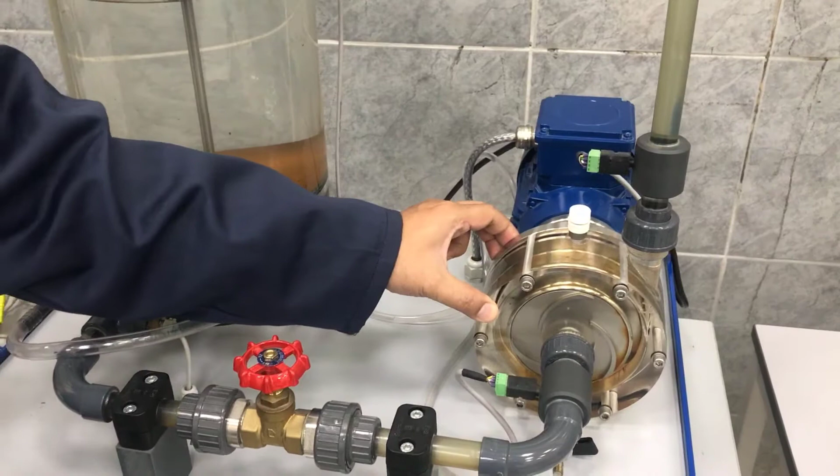Okay, so this equipment is a centrifugal pump experiment. So we can do experiments with a centrifugal pump here. So let me check some of the parts here. So our centrifugal pump is located here. So the housing or the casing, it is on a solid acrylic glass.

Then you have the bleeding section here. So we will bleed the pump by opening this nut here. So this is to remove the air inside the pump. So then we have this valve, we call it V1. So this valve will control the suction side of the pump. Then we have V2, controlling the discharge of the pump.

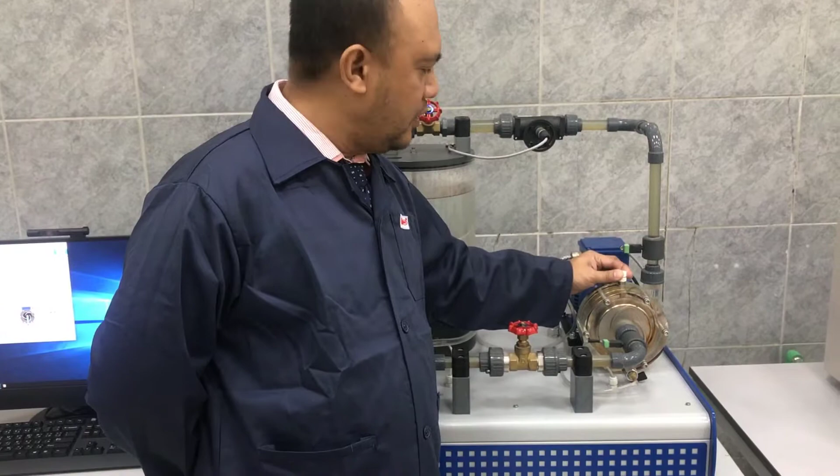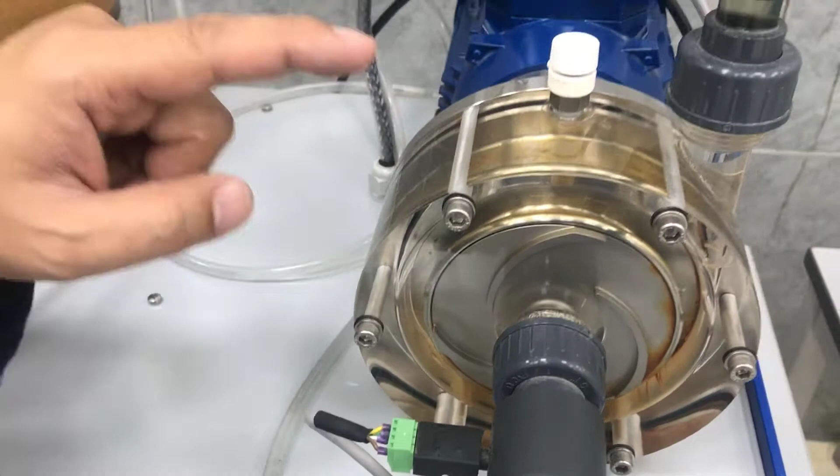So for experiment number 1, we will be measuring the head and the power of a centrifugal pump. So the first step is to bleed the pump. So open this, release the air from the pump and close it tightly. So as you can see, the pump is filled with water only. So this is the first step. The next step is to fully open V1 and V2, this valve. Okay? So we have 2 gate valves here, both must be fully open.

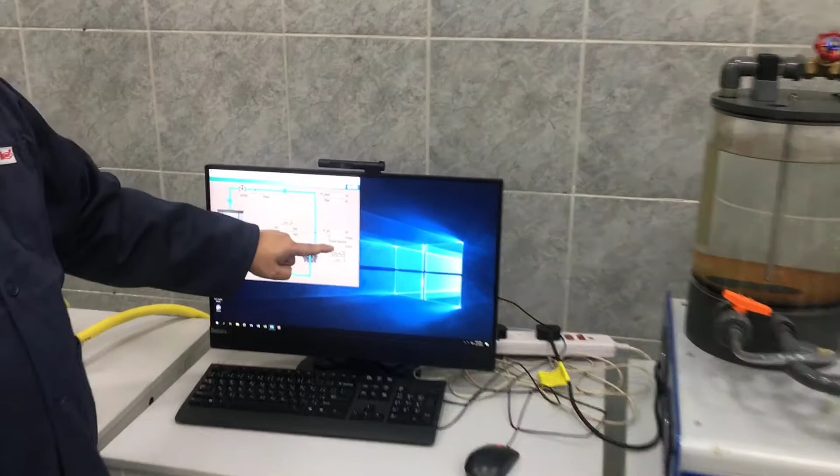Now, referring to the table, we will set the RPM, the pump speed, to 3000 RPM. So this centrifugal pump is interfacing with this computer, with this PC. So all the control will be on this software. So after bleeding the pump, opening the valves V1 and V2, set the speed to 3000 RPM. So we will be using this RPM all throughout the experiment.

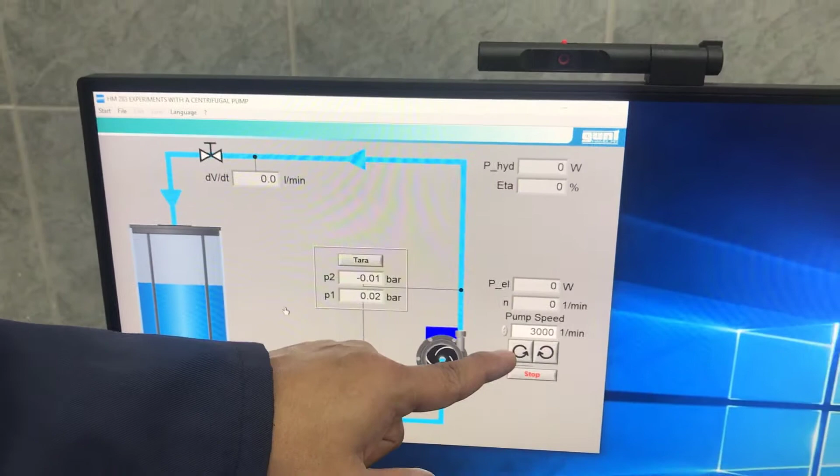So how to switch on the pump? Press this one. So this symbol means the rotation of the pump is in anti-clockwise direction. So as you can see here on the pump, when the pump rotates in anti-clockwise direction, the direction of the water pumping is towards this direction, so moving up. So the rotation is anti-clockwise direction.

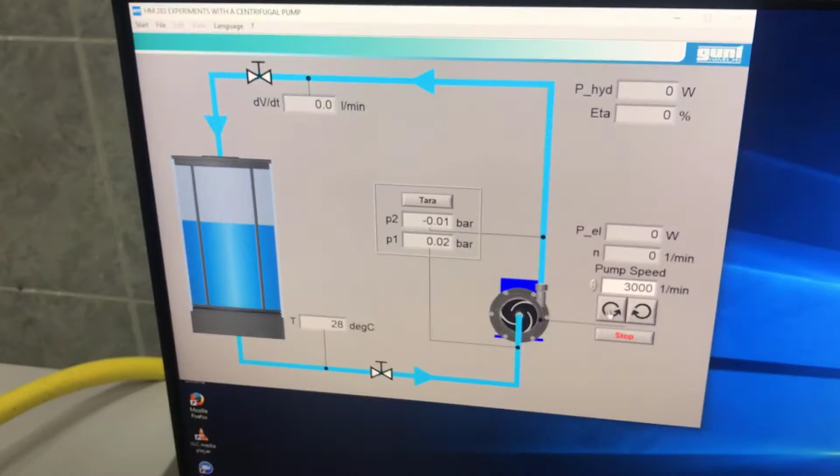So let's start checking first the operation of the pump. So by pressing this, the pump will start running. So from the suction side, through the eye of the centrifugal pump, the impeller, and then pump it up. So this sensor here measures P1, the pressure in the suction, and P2 at this point, the pressure at the discharge.

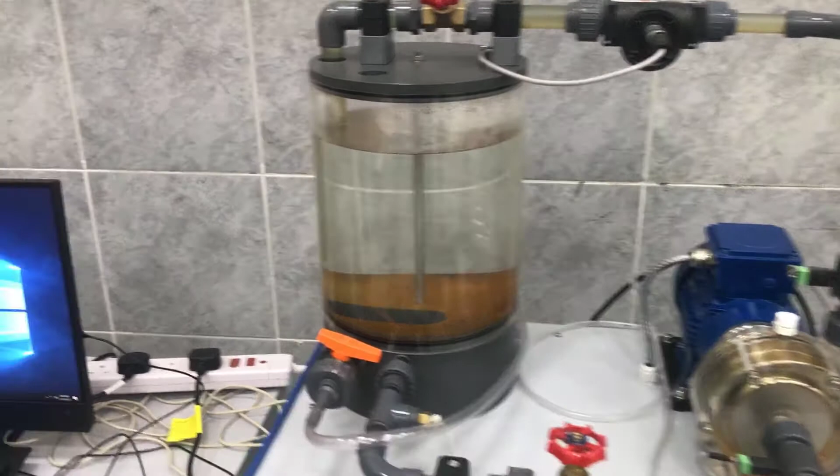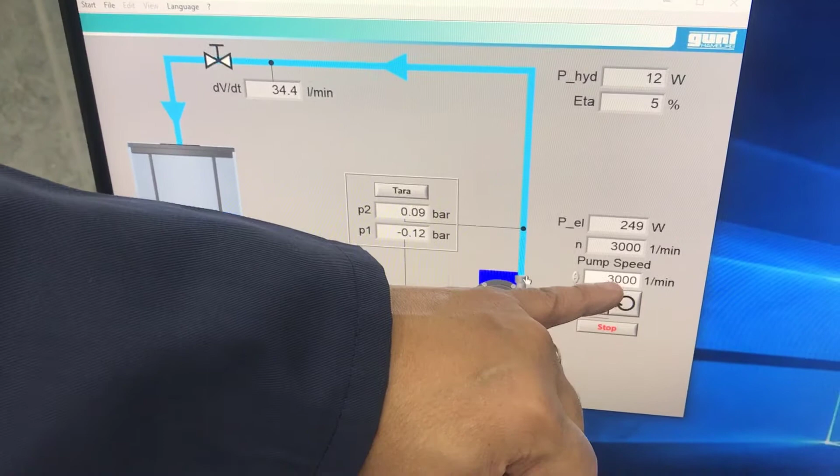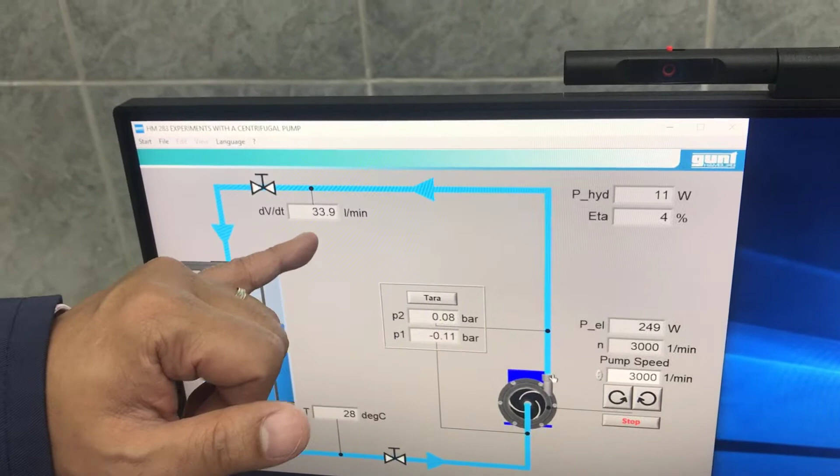So for the first trial, we will take the reading of RPM. So we will be using this one for all the trials, 3000 revolutions per minute. So this is our RPM. Then we will measure the Q. Q is in liters per minute. So 34.4 liters per minute. If you can see on the table, it should be in liters per second. So this reading, you should convert it into liters per second.

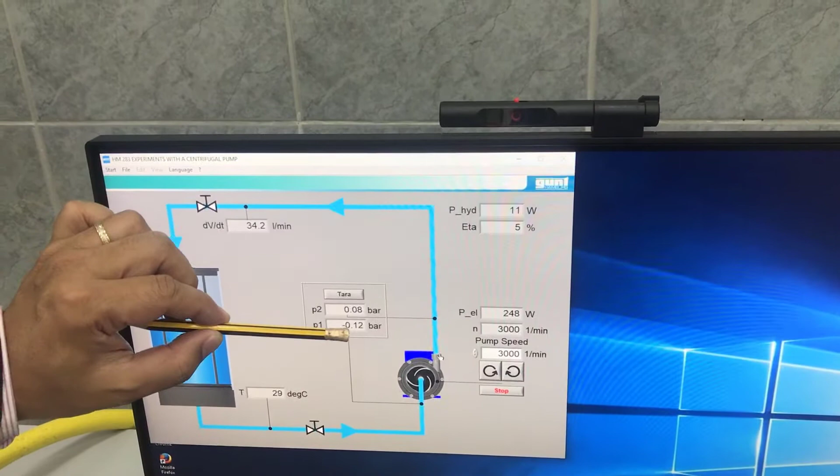So let's take the reading for our trial 1. So the pump speed is 3000 RPM. The Q is 34.2 liters per minute. Now P1. So P1 will be negative 0.12 bar. So as you notice here, the unit is in bar. So you need to convert it to Pascal in the experiment. So we'll be using metric units in the experiment.

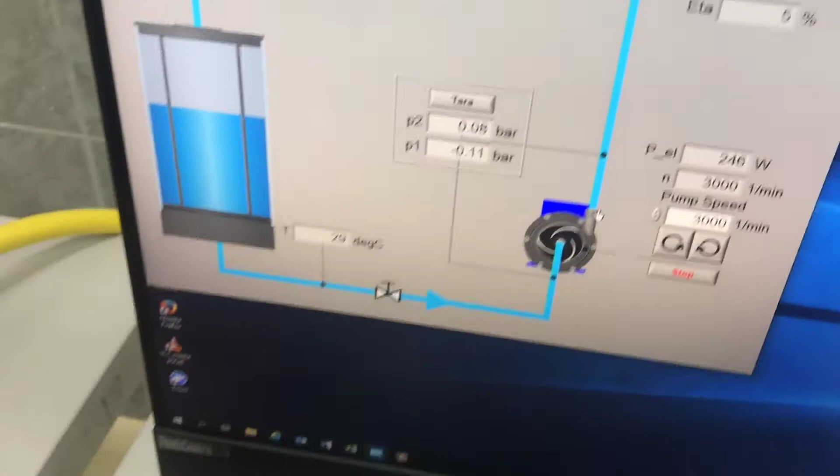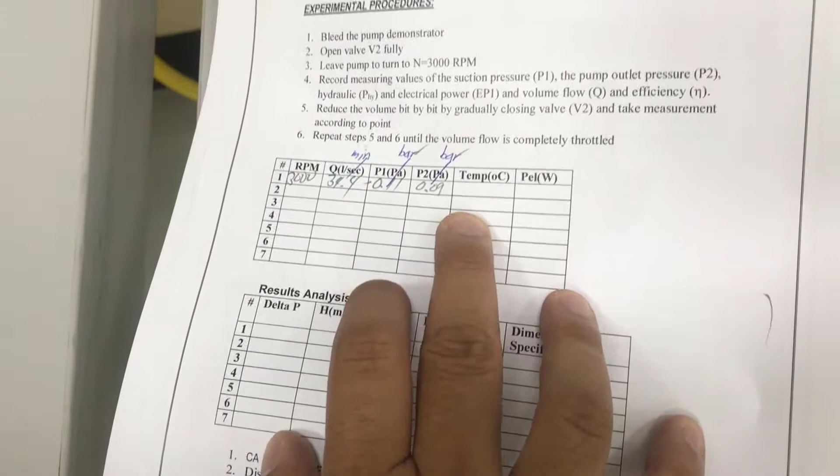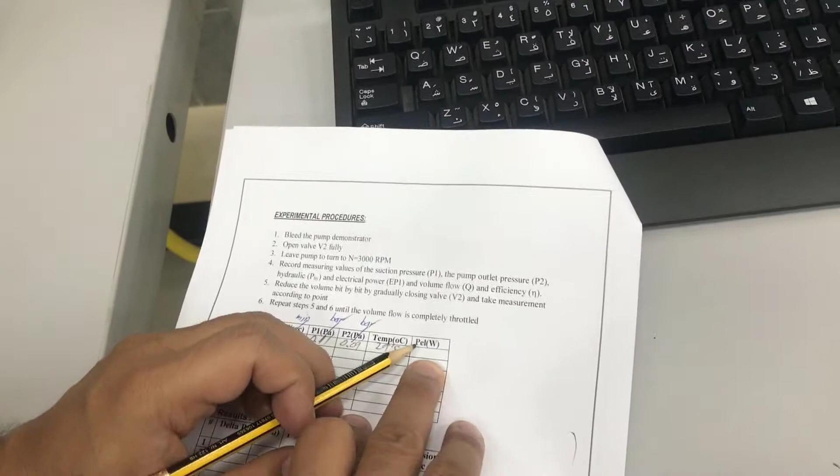So 0.12 bar for P1 and 0.08 bar for P2. So this is in bar. Now the temperature, it is also shown in the software. So this is the temperature running on the system. So we have 29 degrees. And the power, electrical power. So electrical power, this is PEL. So you have 248 watts.

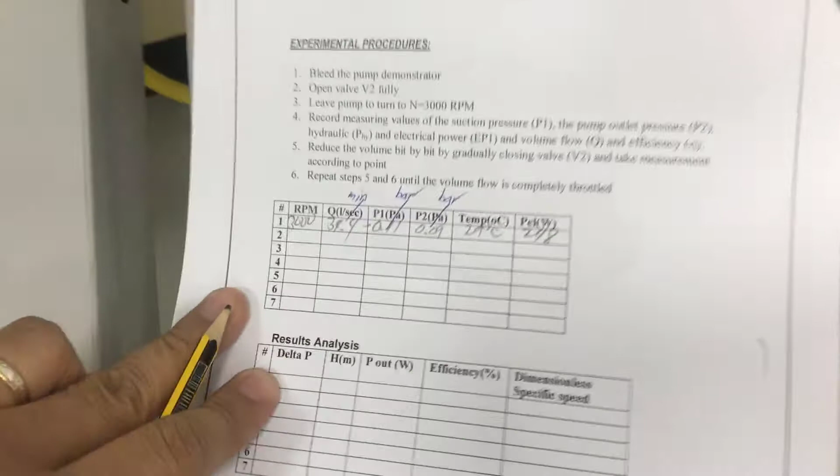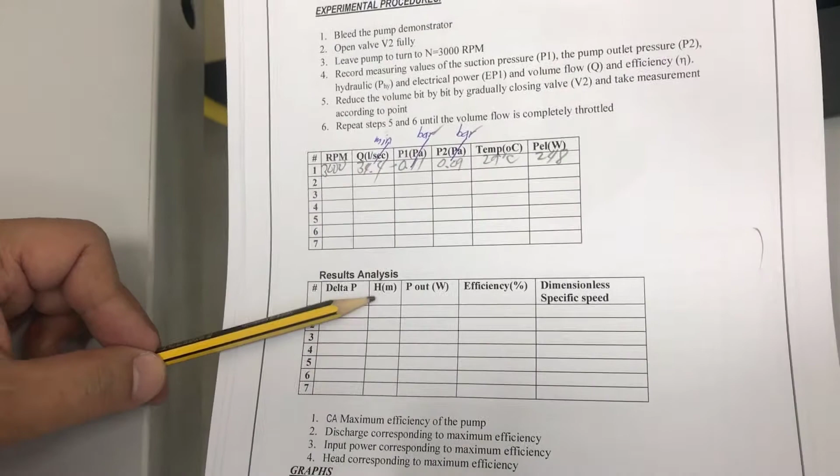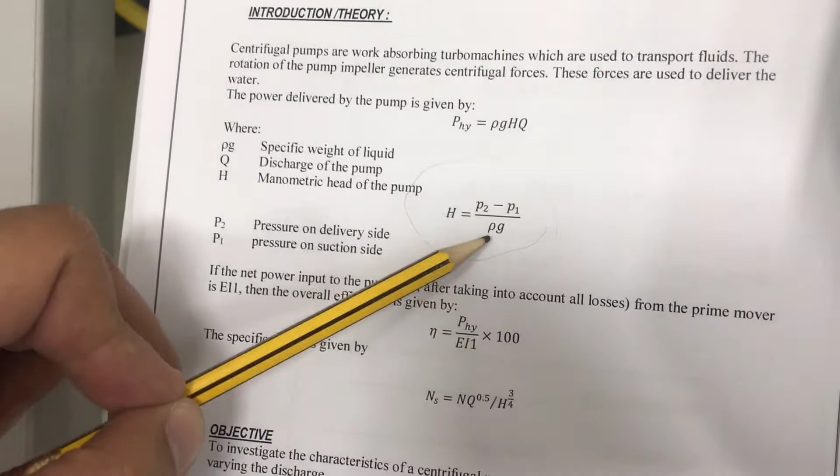Okay? Now, the result of analysis, these are all taken from our reading here. So, delta P, this is the difference between P2 and P1. The H, this is the head. So, it will be calculated from the theory using this given formula: delta P divided by rho g, so the density of the water multiplied by 9.8 meters per second squared. Okay? So, you will get the value of H.

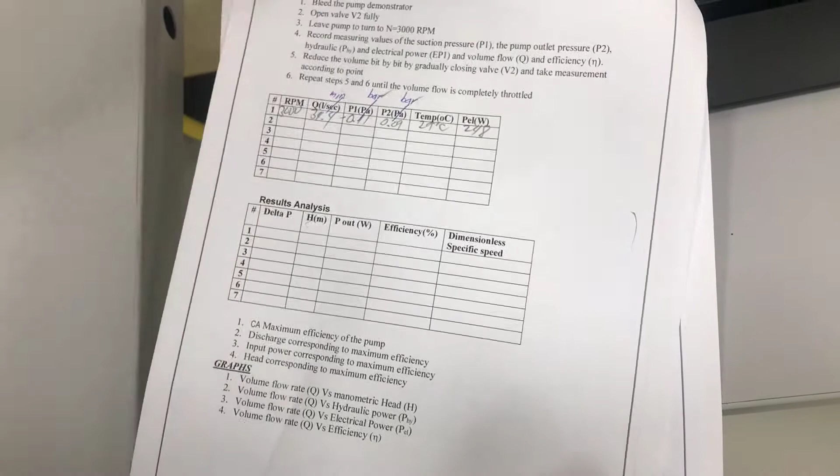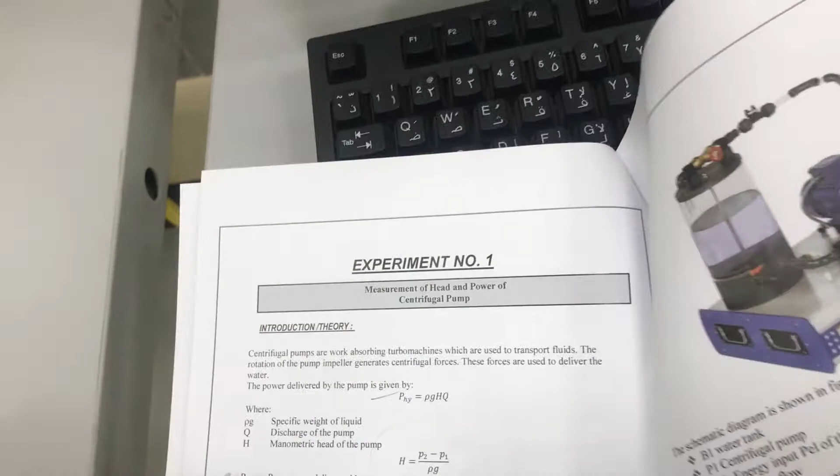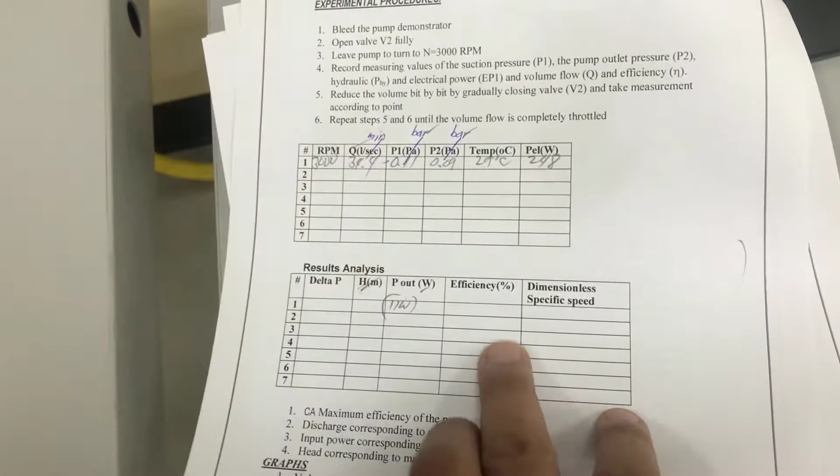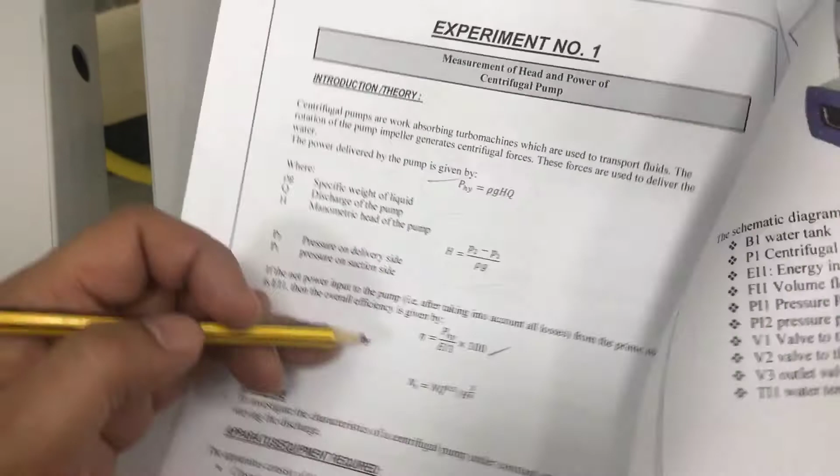Now, P out, this is the hydraulic power. So, just compare this one: this 11 watts experimental, and calculate it using power delivered by the pump. This is by theoretical, so rho g multiplied by HQ. You have the value of H, you have the value of Q. Right here, the P output. So, the efficiency, we have also here the formula for efficiency. And you have the specific speed. The specific speed formula is also taken from the theory part of the experiment.

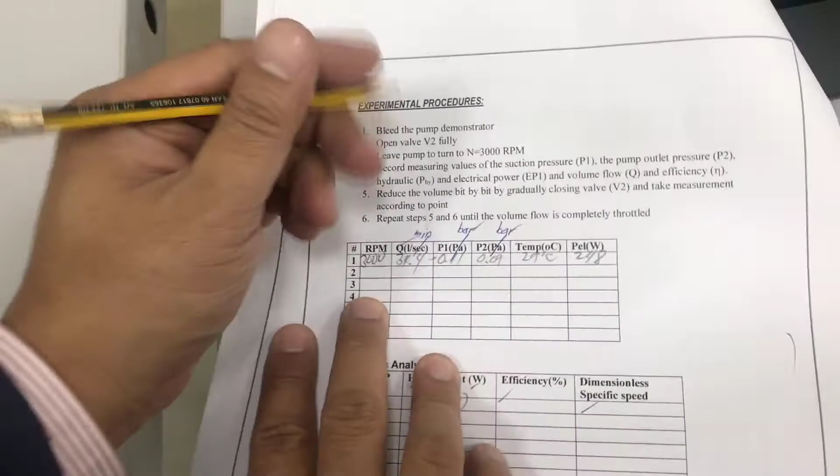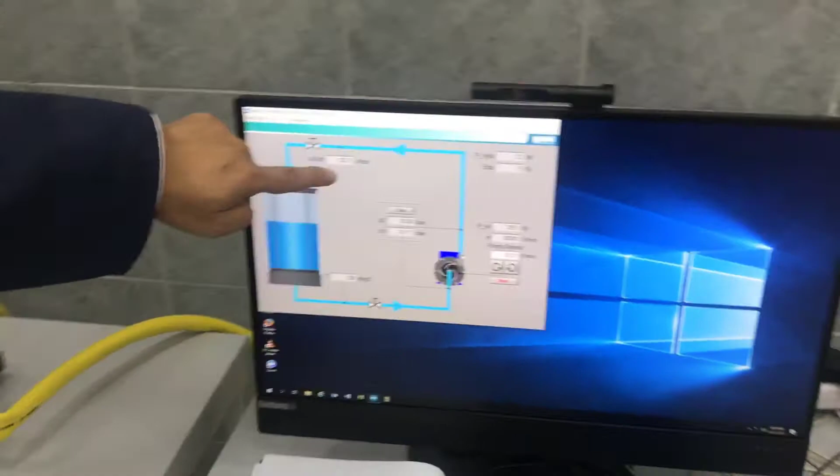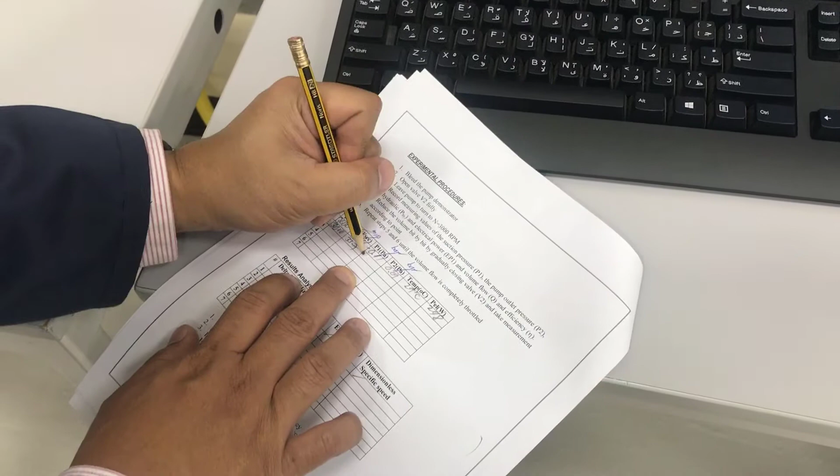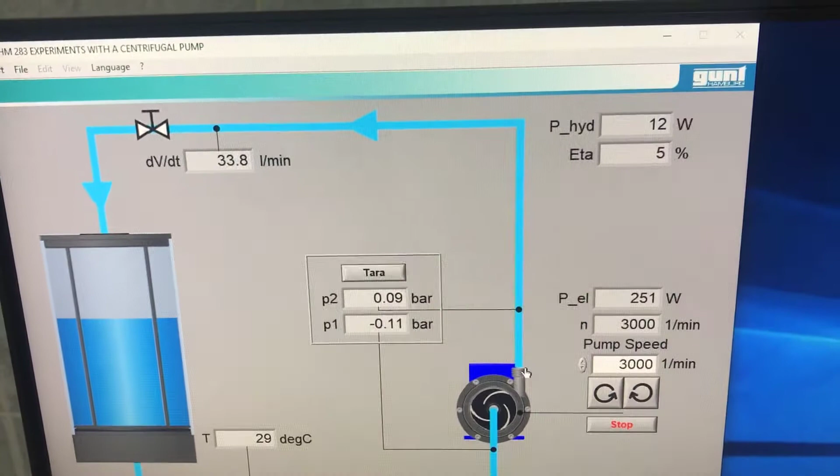So let us continue doing the experiment. Now we will go on trial 2. We will be using the same RPM, 3000. But in this case, we will reduce the value of Q by closing this valve V2 gradually, bit by bit. So I'm closing it, and take the reading of Q. As you observe, this is decreasing. So 33.7, and then you have 0.11 bar and 0.1 bar. Temperature will be the same, 29 degrees. The power will be 250. So this is our electrical power.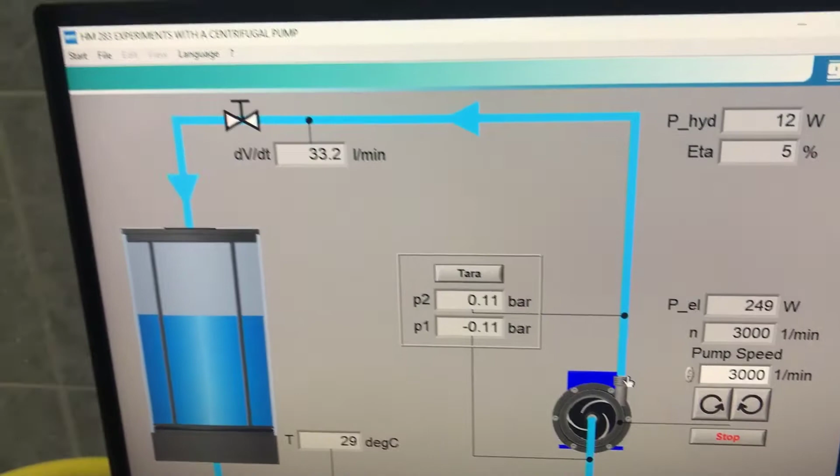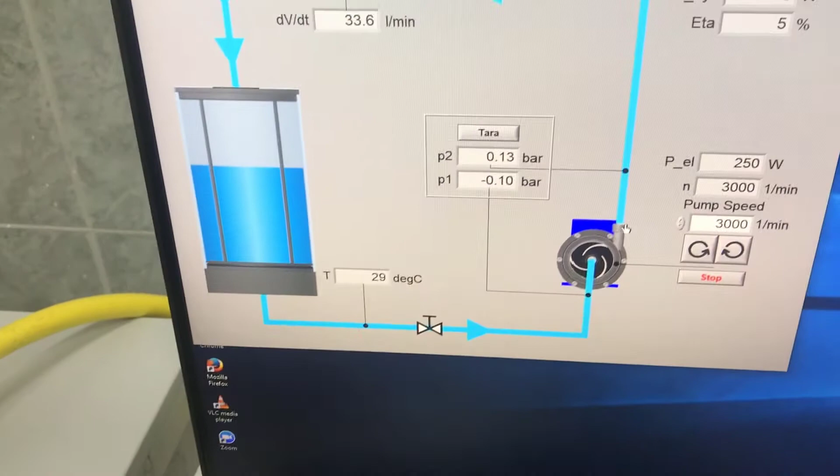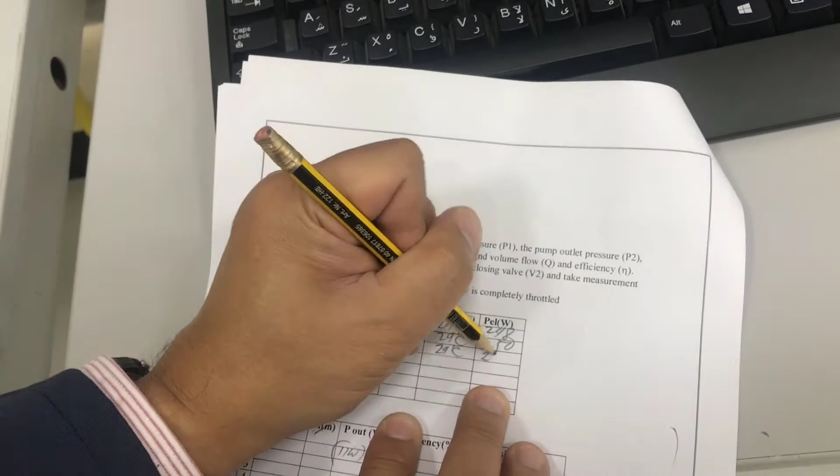Next, trial 3, also 3000 RPM. Again, close the valve V2 just a little. So we are throttling the discharge of the pump. So trial 3, take the reading. You will be having 33.6, let's say 33.6. The pressure will be the same, 0.11, and P2 will be 0.13. So the P2 is increasing. The temperature will be the same, 29 degrees. The power will be 249. So it is almost the same.

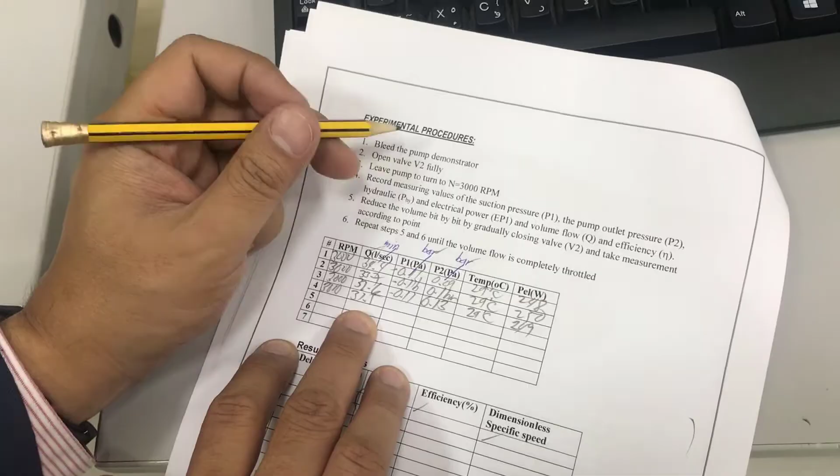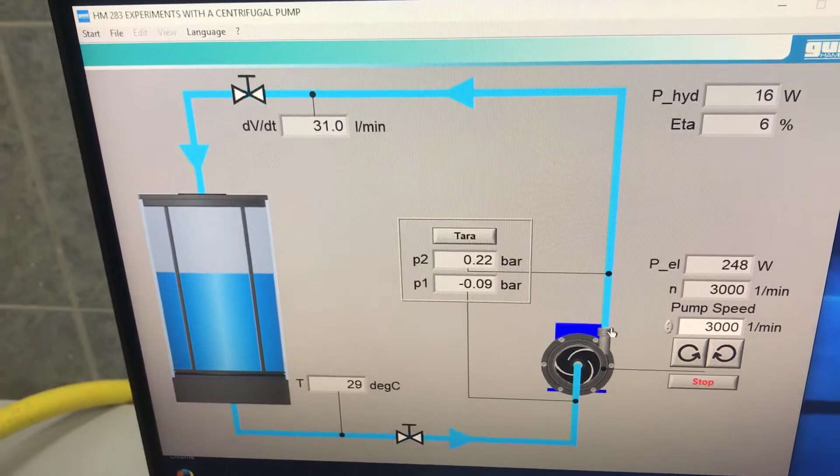Now again, close the valve V2 for trial number 4. Take the reading. So you have 31.5 at the same RPM, 3000 RPM. Pressure will be 0.09 for P1, P2 will be 0.21, with 29 degrees Celsius and 247 watts of power. Next.

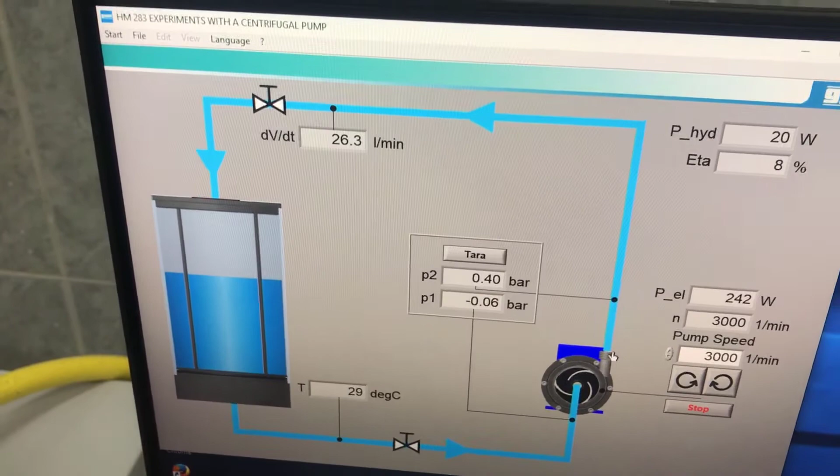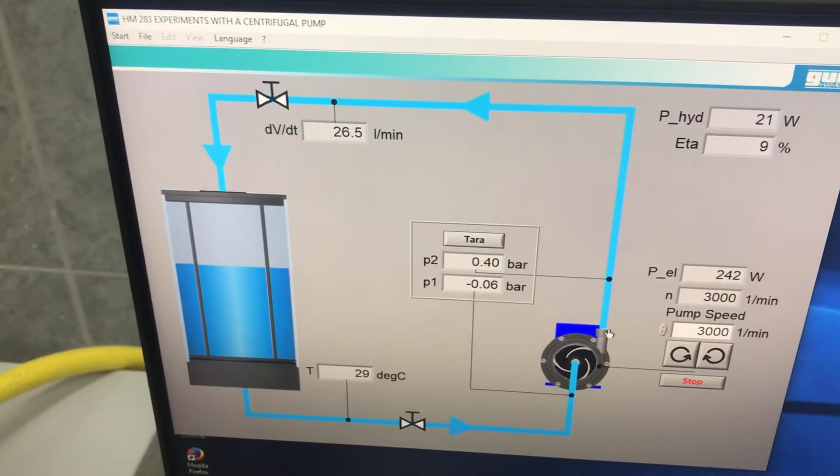So again, decrease the discharge. So you have 26.4 at a pressure of 0.06. So P1 is decreasing. P2 is increasing with the same water temperature, with a power of 241 watts.

So trial 6, you have 3000 RPM. Again, close the valve. Observe the Q or the discharge. So we have 13.6. So P1 reached the 0 point and then 0.77. P2 is increasing, at 29 degrees Celsius and a power of 223 watts.

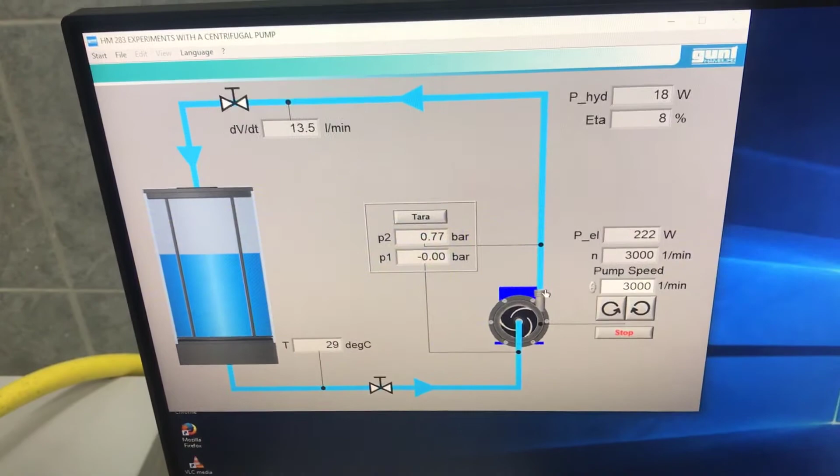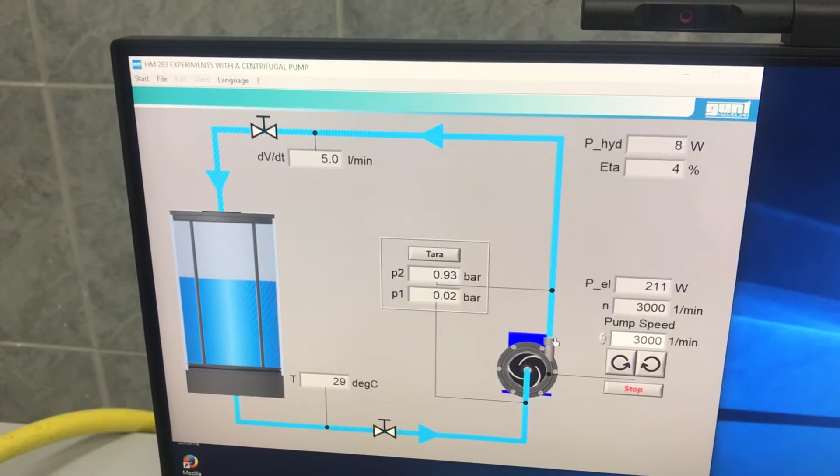Now, for the last trial, it is almost closed. So, fully throttled here, fully closed, almost no discharge. So, you have 3000 RPM, 5.3 liters per minute, 0.02 bar and 0.93 bar, at the same water temperature, 211 watts. So after completing this one, V2 is fully closed. So our table, we did 7 trials here. After completing this table, you will calculate the result using the given formula in the theory part.

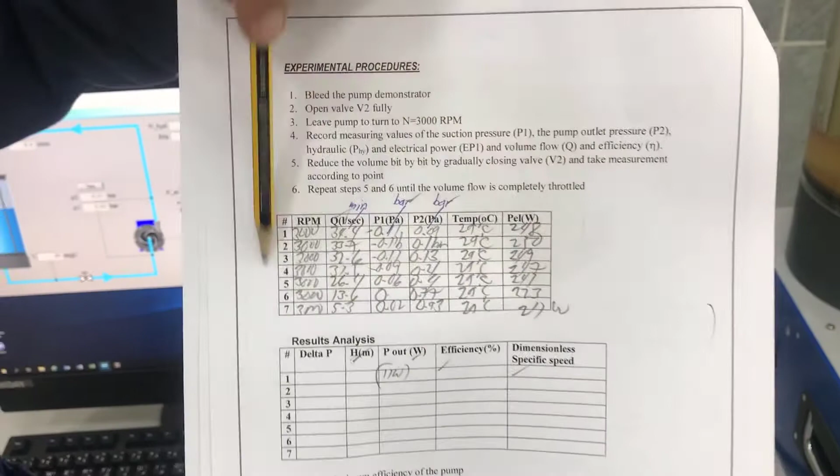So to stop the pump, just press this stop button here, and then the pump will stop running. This experiment can be used also in experiment number 2. So just complete this table and you will use this reading in affinity laws of the pump. So experiment 1 and experiment 2 are somewhat related. Okay?

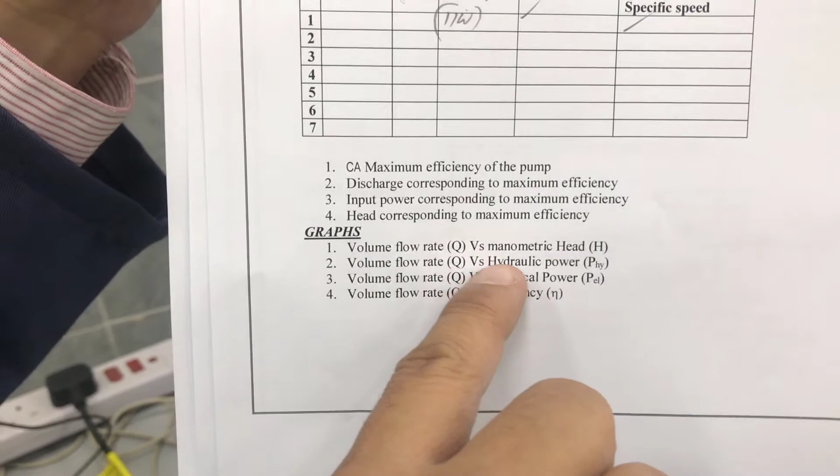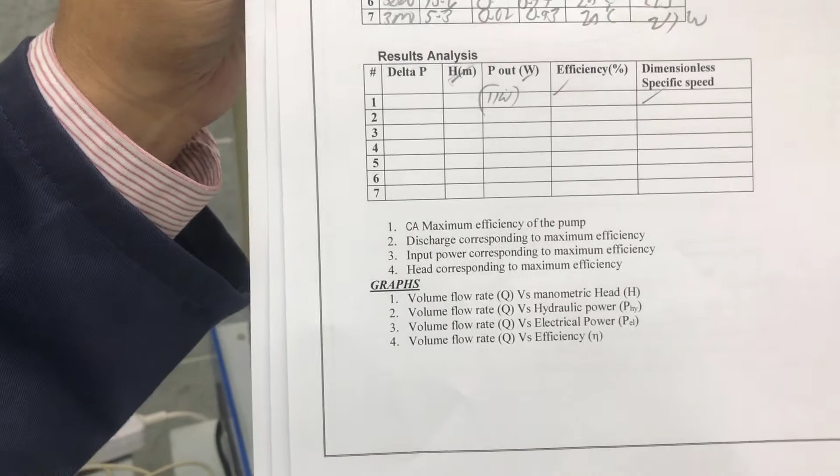So for the graph, you need to plot the volume flow rate versus the manometric head after calculation. Volume flow rate versus hydraulic power. So it will be given here. Electrical power, volume flow rate, and efficiency. So you have 4 graphs to be completed in submitting the report. Okay, so that's all for experiment number 1.